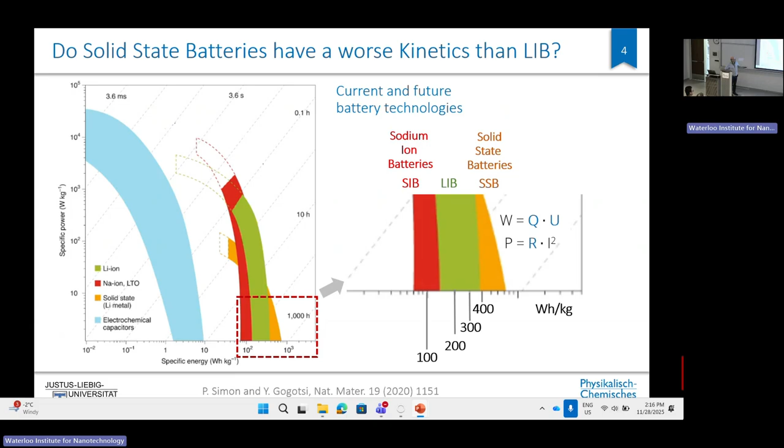So energy is simple, but the kinetics is pretty difficult to estimate. That's why I think kinetics really demands experimental studies. Now, the red and the yellow area, let me briefly explain. From the bottom part, the poor part of this graph, the sodium-ion battery is coming closer. That's for reasons of resources and primarily for techno-economic reasons. The battery world is developing sodium-ion batteries as an alternative at the lower end of the lithium-ion battery. At the upper end, there is the hope that solid-state batteries make it, and we will see why there is hope.

But one point on the kinetics: estimating the thermodynamics, the energy content of a battery, is pretty simple if you know your cell reaction, if you know what is in your cell. But kinetics is difficult because there are different levels of description. You first of all have to understand transport on the molecular materials level. How are lithium and the electrons being transported? Then you make an electrode out of that. These electrodes may lead to curved paths for ions and electrons. You have tortuosity effects. You have pores here. Really a microstructure that complicates the kinetics, the paths of ions and electrons. Then, of course, you bring that into a cell. So describing kinetics is theoretically much more challenging than describing the energy density.

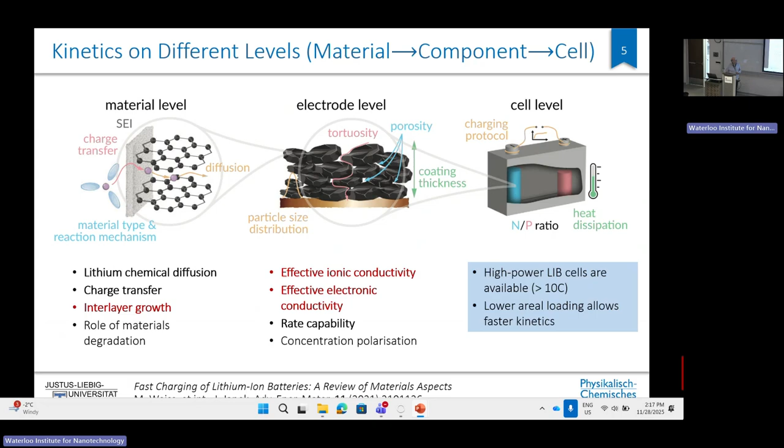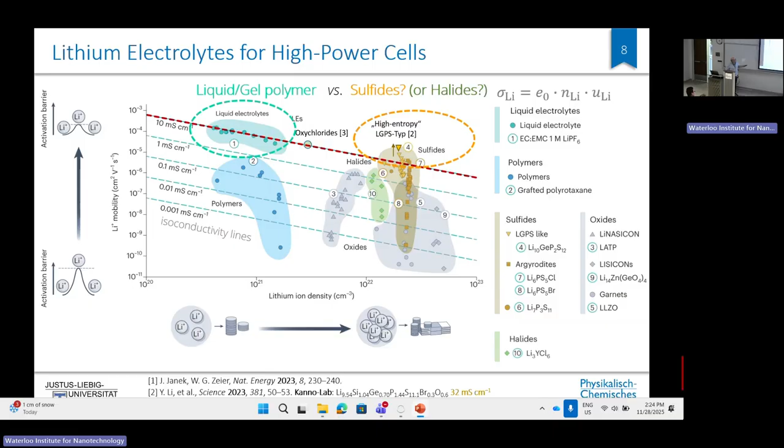Okay, and with that, we can enter into cell concepts, and let's just consider one cell concept, and that is what Samsung advanced a few years ago, which they coined the so-called anode-free cell concept. Now, this is, of course, if you ever had a base course in electrochemistry, quite a bad term. There is no electrochemical cell without an anode. There is always an anode. So what they meant, of course, is reservoir-free. So I prefer reservoir-free cell.

So you just have a current collector. You have your cathode, your positive electrode that contains all the lithium, or sodium in case of sodium systems. And then you have an electrolyte. Either you have a liquid electrolyte or gel polymer, a true polymer electrolyte, or you may go to a true ceramic cell or to hybrid systems where you have a separator that is made of a different electrolyte than the catholyte. And these two cell concepts, I think, are something Linda and I are pursuing and many people in the world are trying to get, because if you don't bring lithium into the cell from the very beginning, of course, you save money.

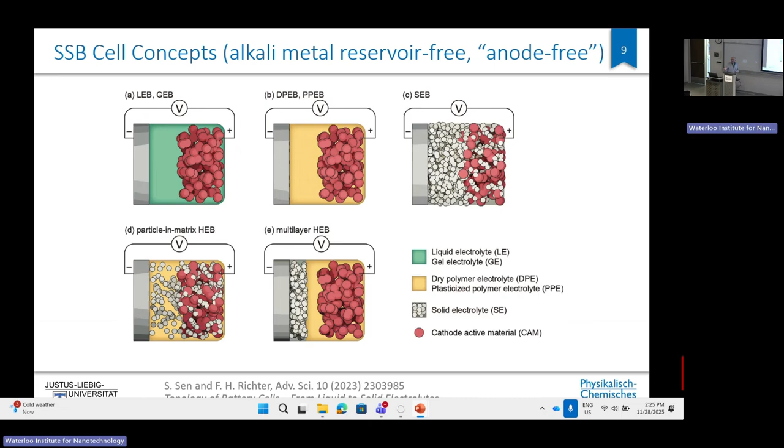It's also easier to process, because processing 10 micron thin or 20 micron thin lithium foils is pretty difficult, in fact, and not cheap. Whether it really works is another question, but I think it's a great idea, of course, to have all the lithium here and in the first charging step, just to place lithium here and to cycle it. Of course, what you need in order to have a good cell is 100% Coulombic efficiency. You should not lose any lithium. And this brings me, of course, to the first point.

This is a bit different cartoon of such a reservoir-free cell. We have a separator electrolyte that should be rather thin, I would say 10 micron. Modern separators in your smartphones are even sometimes thinner than 10 micron. You need a thick cathode, thick because you have to store lots of lithium there. You need a high areal capacity in order to get a high energy density of your cell. And then here the lithium is being cycled.

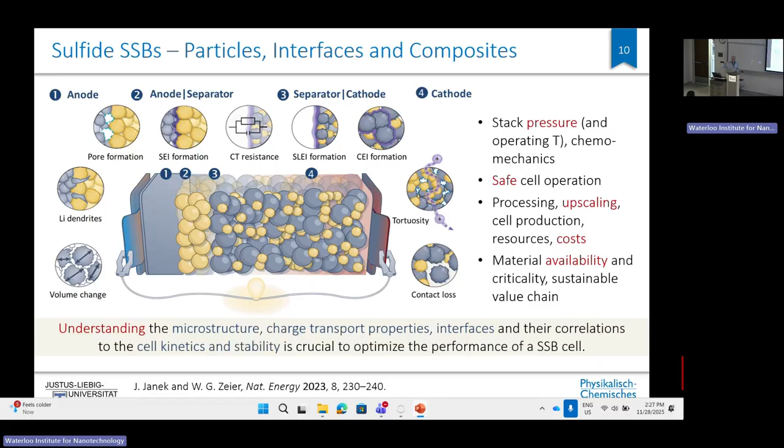And there are quite some issues, all related to the different interfaces in these cells. What my group is doing is trying to understand the microstructure and its correlation with the interfaces to bring down stack pressure. Because if you ever experienced mixing dry peas and beans, you will know there is always empty space in between, and contact may depend, in fact, if the peas and beans are deformable, on pressure. That is a key issue with solid state batteries. So far they mostly operate at relatively high stack pressure, and that has to be reduced. It is one of the major issues.

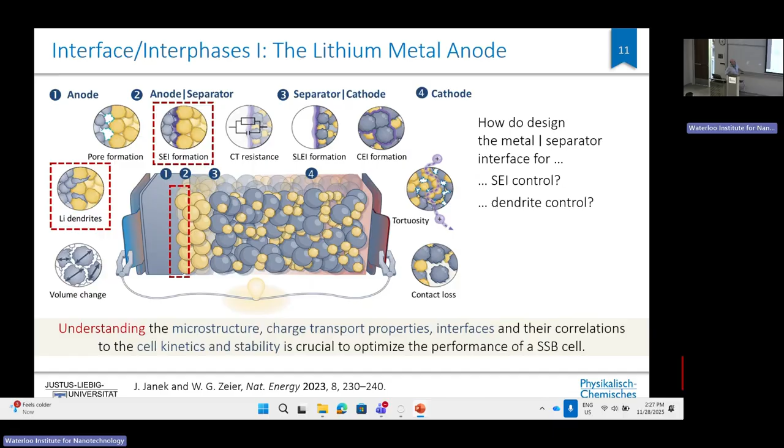Okay, so as I said, let's look first into interfaces. Let's look at the negative electrode interface, and let's believe we can operate with lithium metal, and see whether the electrolytes are stable. This is an important subject that, in fact, in any kind of solid state battery, the same cartoon could in principle be designed for a liquid-based cell. The negative electrode has a very high chemical potential of lithium. If you work with lithium metal, it is the highest chemical potential of lithium you can take, the standard potential of lithium. It's a high chemical potential. So this is chemical potential, not electric potential at the ends of your cell. The electric potential would exactly be the other way around. So there is a negative sign between the chemical potential and the electric potential. So let's think in chemical potential terms.

The anode has a very high chemical potential, and that high chemical potential can reduce your solid electrolyte. If it reduces the solid electrolyte, because the reduction potential of the solid electrolyte is not high enough, then it will decompose, and you will get an SEI. You will get a layer of degraded electrolyte. Now, think in terms of an anode-free or reservoir-free cell. This is, of course, bad.

You deposit your lithium, and it will be consumed by the electrolyte. The question is, to what extent? Is it a minor process? Is it a major process? Because that determines whether you have to add a bit more lithium into your cell, and you have to make it bigger than necessary. And on the cathode side, of course, the same happens.

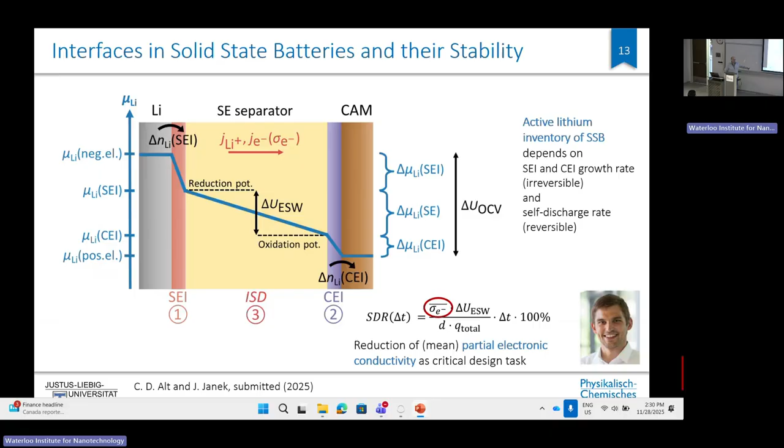For lithium-ion batteries, the self-discharge is very difficult to estimate, because it's due to complex redox shuttles in the liquid electrolyte. Lots of stuff can move between the electrodes across the liquid electrolyte. In a solid-state battery with inorganic solid electrolytes, only electrons can cause an internal short circuit. So the question is, what is the minor electronic conductivity of the solid electrolyte? And that is not well treated and not so well known, I would say. We consider the self-discharge of solid-state batteries may even be an advantage, because if you really bring down the electronic conductivity to very low values, it can be that solid-state batteries hold their charge longer than a typical lithium-ion battery.

Okay, now we wanted to know, in fact, how much lithium is being taken up by solid electrolytes, and Burak, a postdoc in my group, had a very ingenious idea. It's not my idea, so I can say that I found it ingenious. He said, okay, I have a lithium anode here. This is my source of lithium, and here's my current collector, and I play the game of a reservoir-free cell. So I plate lithium here. If my electrolyte is stable, the lithium will stay and stay and stay and will not react away. If my electrolyte reacts, an SEI will form. It will consume the lithium over time until the lithium is gone.

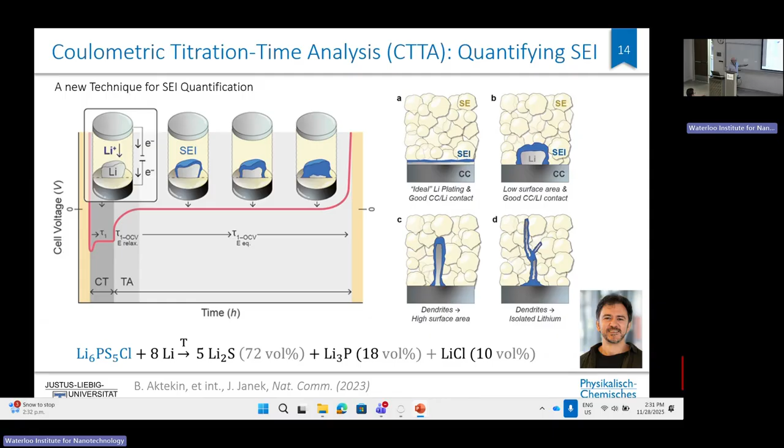So this is cell voltage, this is time. I plate lithium here, then I let it relax, and then I wait. As long as there is lithium here, the cell voltage is 0 volt. If all lithium is consumed and no lithium is here, the voltage will rise quickly. That has reasons, and it will reach a rather high positive value. And you then simply measure the time for the consumption. You make that in several steps. Each step looks the same: nucleation, plating, consumption, and you see that it gets longer and longer and longer.

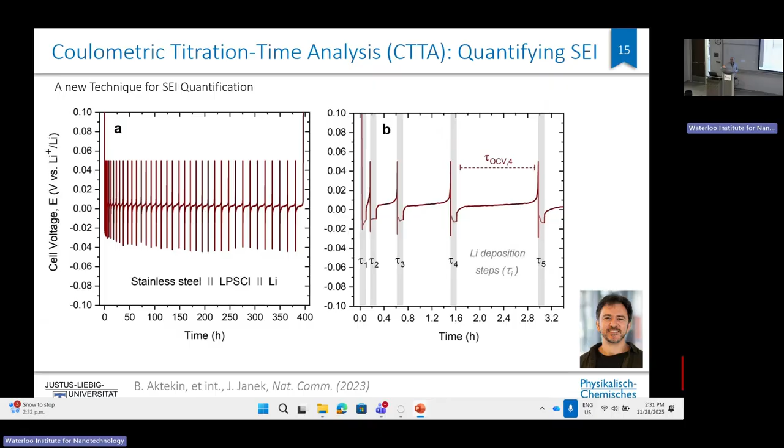What in principle happens is that you form this layer, and the growth takes longer and longer, because it's a diffusion-controlled process. In fact, these curves for charge consumed by the SEI over time show mostly simple parabolic time behavior, as defined by simple diffusion across the SEI. And you see here different solid electrolytes. This is a famous oxide, lithium lanthanum zirconate, and this graph rarely consumes any lithium because it's simply stable. There is lithium germanium thiophosphate. It contains germanium. Germanium is easily reduced by lithium, and it consumes lots of lithium, even within, let's say, 150 hours. The argyrodite, which is a Li6PS5Cl, a sulfide electrolyte,

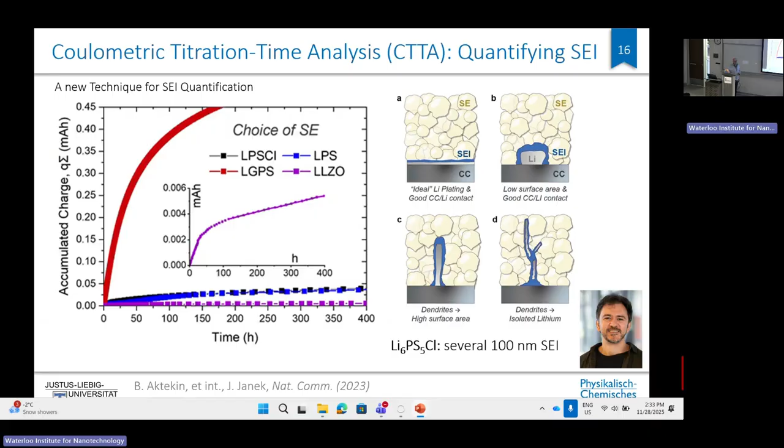Well, it's not so bad. It consumes, let's say, within 400 hours, 25 microamp hours per square centimeter, roughly. That's not so much, but it continues. So this is an issue. There is an SEI forming, and this SEI is still today, I would say, not 100% understood. What I can say is that this can be designed. You can, of course, modify your solid electrolytes such that they form less and more stable SEI, and that's a very important part of the long-term stability of any solid electrolyte with your lithium electrode.

And you see here the effect of temperature. Of course, with increasing temperature, it gets worse. Something that is very important and surprised me is, now we had the garnet oxide as a stable electrolyte. So we used that, but nevertheless, we saw that lithium also disappeared. Where does it go? It goes into the current collector. So the current collectors, the metals, take up lithium.

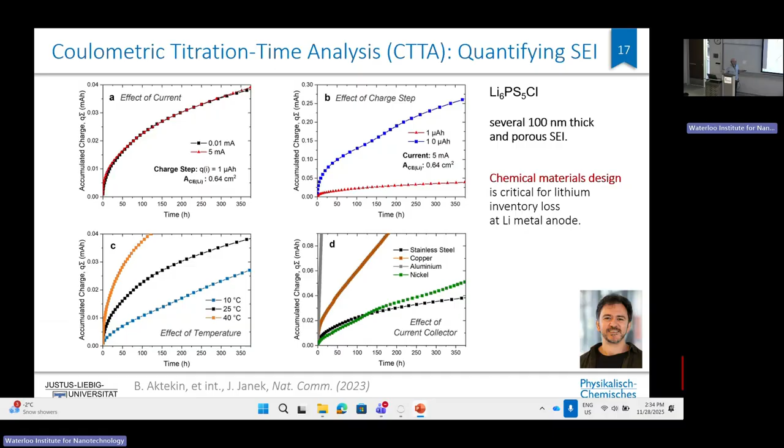And copper, that is considered not to alloy with lithium, takes up quite some lithium. This is not so well known, but it takes up lithium. And meanwhile, I would say we have more studies of that. So copper is really taking up lithium. Of course, aluminum takes up a lot of lithium. In principle, stainless steel and nickel could be better current collectors. But on the other hand, in industry, nobody will quit copper because copper foils are a ready-made mass-marketed metal product. So I think that we rather have to see, is this really an issue or can that be overcome?

Okay, and that brings me to summarize the stability issues. Let's look to the left side. So the oxides, in fact, we found only, I would say, the garnet oxide really is stable. That's why companies worldwide explore this material as a separator material. The problem is to make thin, 10 micron thin, large scale area separators, ceramic separators, cheap and pinhole free over square meters. This is a pretty tough subject. QuantumScape in the US, I think, is trying that since years. And you probably can see the shares of QuantumScape, whether they will be successful or not with that enterprise.

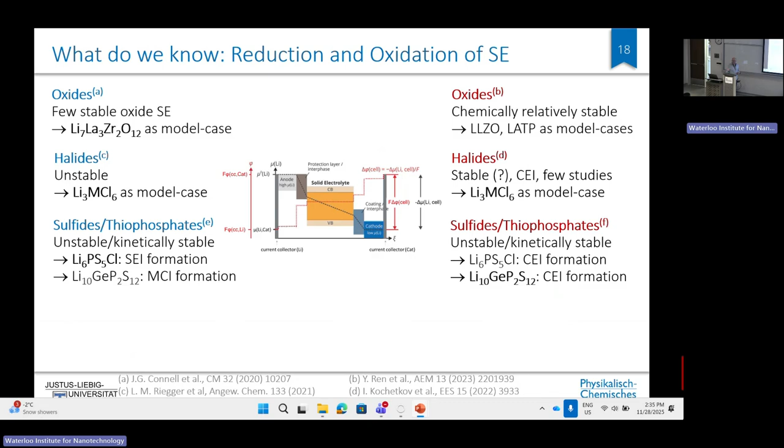The halides or oxyhalides are mostly unstable versus lithium because the metal ions are being reduced. I had a discussion with Linda on that point here, and we probably have to look a bit deeper into some of these materials, but most of these materials are probably not stable at the negative side. The sulfides and thiophosphates are all thermodynamically unstable, but they may form nice, kinetically stable SEIs. Not all, so this is case by case. And polymers, I would say, well, it depends on the polymer, whether they are really stable. If they are stable, then they're probably kinetically stable. They form an SEI, but this is definitely not my piece of cake. They may also have issues with dendrite formation if you go to high rates. Let's exclude polymers here. This is a bit beyond my expertise.

On the cathode side, I will not comment so much on that. The halides may have a major advantage because particularly the chlorides may be stable at the high potentials of the cathode, whereas all the sulfides are not stable because the sulfur is easily being oxidized already at 2.5 volt versus lithium, so they need to be protected. So that means the best electrolytes we have with respect to conductivity are the worst when it comes to stability. And this is, of course, something we have really to take care of. That's why I said design of interfaces. We have to design interfaces such that they survive.

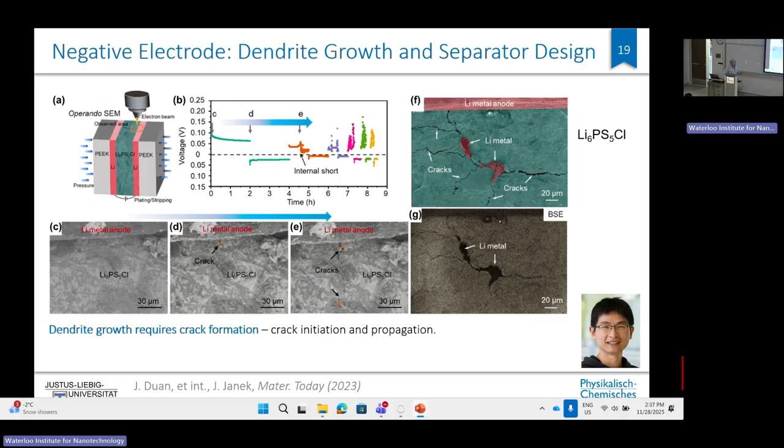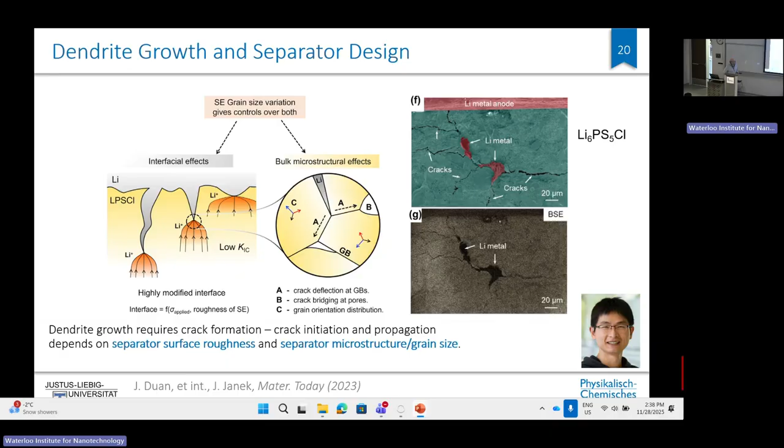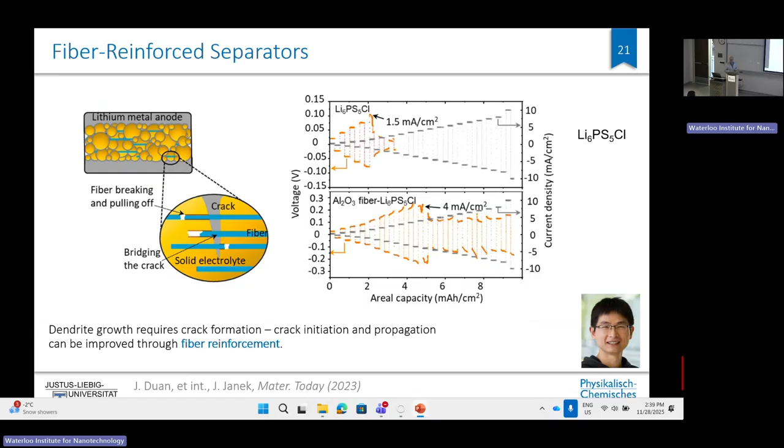And in fact, in these kind of dendrite tests, he could extend the lifetime of the separator to higher critical current densities, because these fibers simply, even if a crack initiated, the crack didn't grow as fast as it would grow in a simple separator. And as I see Mike Pope here, he has just this week had a workshop running on 2D materials. When I put the slides together, I thought maybe 2D materials could be something that help strengthening the separators and improving the chemomechanics of a separator. So that's maybe something worth being discussed.

I need to move on to the cathode side. So let's summarize briefly the anode side. Going for lithium metal, I would say it's by far not solved to have a high rate, stable lithium metal anode. If you see that companies have solved that, okay, let's see the results. Show me real detailed results for current density, stack pressure, and anything. So I think there's still some way to go. And that's why, of course, often the announcements for solid state batteries are shifted and shifted and shifted. They will come, I'm pretty sure, but there are still issues to be overcome. I will be the first to congratulate if that works, but I would say I'm positively critical.

Okay, let's go to the cathode side, where, of course, contact is also quite an issue. These cathode particles and cathode materials breathe as you charge and discharge, and they change volume. The radius isn't changing too much, maybe 100 nanometer or something, but it's enough to open up a crack to the solid electrolyte. And that can so far only be solved by, of course, having strong stack pressure. And often cells are being cycled at 100 megapascal. No way. No car would have enough; you would need quite some steel around your battery to keep 100 megapascal during operation in a car, and that is, of course, compromising the advantages of your cells.

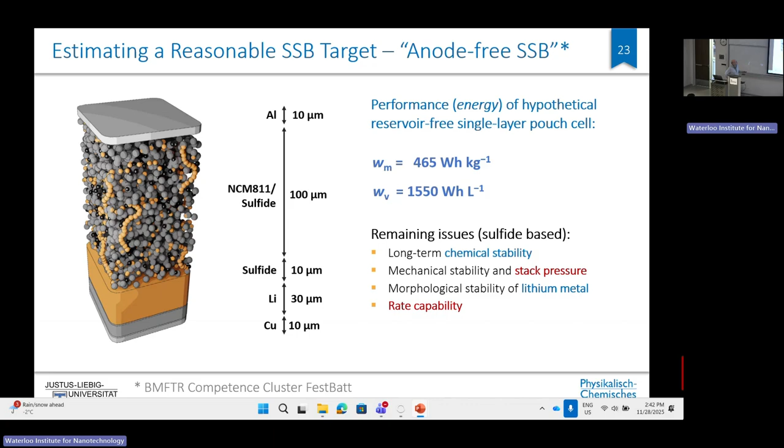There's no housing around that yet. That's not calculated. So with the housing, we may still be a bit below 400 watt hours per kilogram. But you see how difficult it is to really climb up. You have to fight by proper engineering at every corner of your cell to get values that can surpass a lithium-ion battery. Working on solid-state batteries, every day I think, okay, engineers really did so well with liquid-based batteries to achieve the numbers we achieve today. Now, of course, there are still some issues to be solved, particularly rate capability and stack pressure, and stability of this composite over time.

Now, let's think of kinetics. I just learned that for power tools, if you would like to buy a top chainsaw, and I think in Canada there are quite some chainsaws, here in the forests, often they like to see 10C. 10C means that you'd like to charge or discharge your battery in 6 minutes. So 10C means simply that you can charge or discharge your battery 10 times in an hour. So 6 minutes, full charge, full discharge. Of course, OEMs would like to see that also for cars, but it's not yet achieved due to instabilities in cells. But 10C would mean for this cell 65 milliamps per square centimeter current density, which nobody ever really tested. I think for lithium metal, Peter Bruce demonstrated 9 milliamp per square centimeter critical current density without cracking.

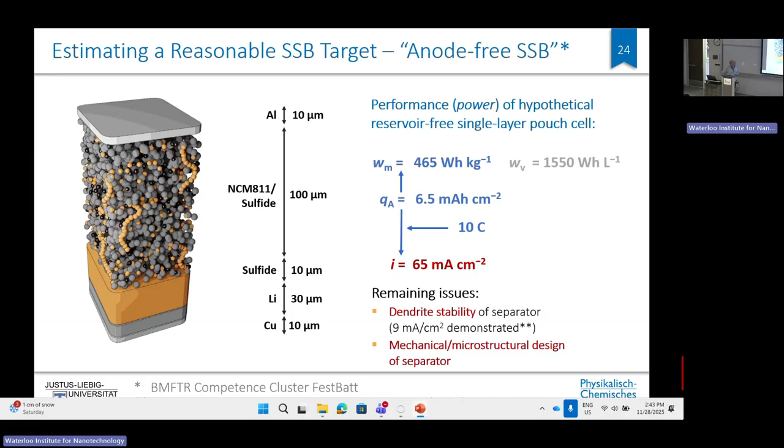So there's still some way to go to achieve that. But we already enter, I would say, when Peter Bruce went beyond 1C, which is already quite some success. So one issue then with the cathode, first of all, let's now slowly come to the cathode side, is

I assume that a typical solid-state battery later may be a bilayer cell, where we have to use one electrolyte that cooperates well with the anode, and one that is optimized for the cathode. That's a major advantage for solid-state batteries. In a liquid cell, you can't use two electrolytes. It's a liquid. It will mix. So the inherent advantage of a solid-state concept is that you can use two different electrolytes.

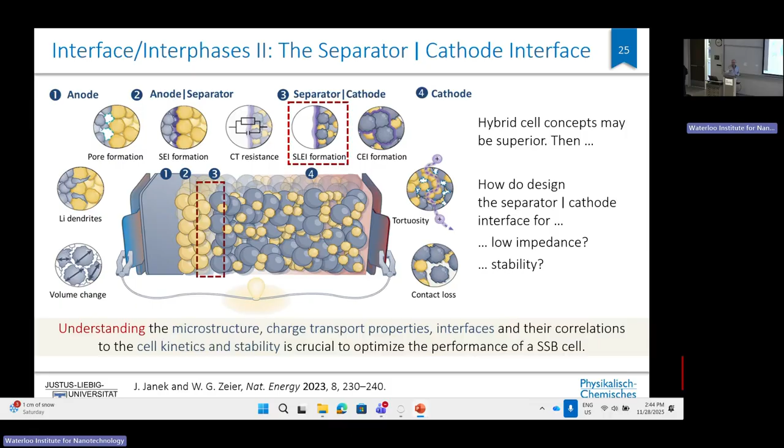But that brings up one new interface. We call it heteroelectrolyte interface, an interface between two different solid electrolytes. And the question is, is that good or bad? How much energy do I need to transfer an ion from one solid electrolyte to another electrolyte? There's not so much data about that. Meanwhile, there is more data, particularly again from the cooperation between Linda, Jeff, and me. And this is a very nice cooperation between Wipin and Leo in my lab. So Wipin here in Linda's group and Leo in my group.

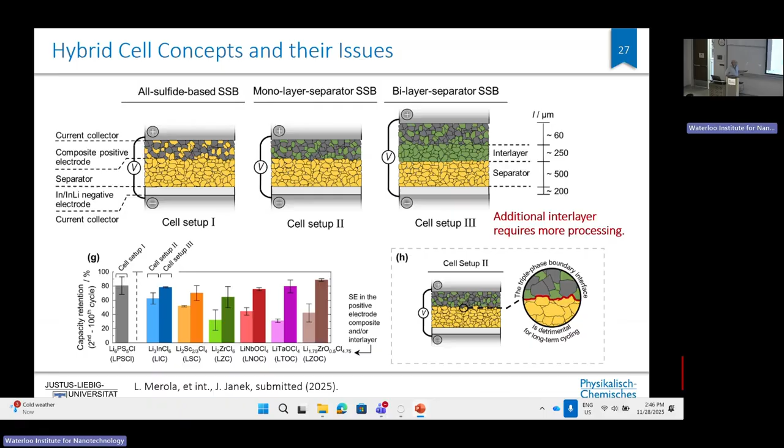And going deeper into that, which I will not do, there is lots of chemistry going on at these triple phase boundaries. So the two electrolytes react via the cathode material, and that is the reason why this simple cell concept, which looks so nice, does in this case not operate so well, and we always need some more interlayer, and then in principle you can achieve a higher stability.

And then let's look really into the cathode, and I look a bit to the time. I think we started a bit late.

Yeah, okay. So let's look now to the cathode side. So the first interface was the anode side. The second interface was this heteroelectrolyte interface, where the story, I think, is still not over, because the problem is, again, if you take two pieces of, let's say, paper on the micro scale, you will not have full contact. And contacting two inorganic solids creates a lot of pores at the interface that causes constriction, only few contact paths, and the resistance always still is too high. And these interfaces also have to be designed, which I think is not yet done.

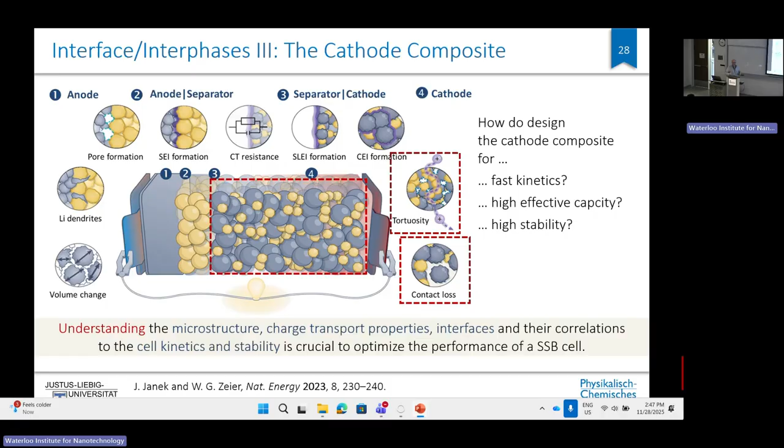Okay, let's, however, look to maybe the other most important part of the battery, and that is, of course, the positive electrode. It contains in the reservoir-free cell all the lithium. So that's, of course, why it's so important to understand that better.

Now, quite some time ago, Anja Bielefeld in my group, who meanwhile has her own group in Giessen, studied what we have to do to get a good cathode composite. And if I speak of composite, I mean the cathode material that stores the lithium and the electrolyte. Two different powders we have to mix. Think of two powders with particle size distribution that we have to mix. And I will show on one of the next slides that one of the best things we did was starting a cooperation with particle engineers. They know exactly how to mix properly.

And as a chemist, I only learned how to mix liquids, but not how to mix solids properly. That's much more difficult, in fact. So what Philip did, he determined what is really the ionic conductivity and the electronic conductivity. Both are needed in a composite because the electrons from the electrode and the ions from the electrolyte have to come together to store lithium or to get lithium out. So you need two, let's say, good interconnected paths, ionic and electronic, to get a good electrode.

Well, like in your lung, where you have, of course, highly tortuous ways for air and for blood in order to have an effective breathing process. So this is the same with ions and electrons in the cell. And here, as a fraction of cathode material, Philip measured the electronic conductivity and the ionic conductivity. And of course, quite trivial: if you have pure electrolyte, the ionic conductivity is high; pure cathode material, the electronic conductivity is high, because these electrode materials are primarily electronically conducting. Ionic transport is there, but it's not so fast. That's why, of course, cathode particles are small, in order to have short diffusion lengths for the incorporation and excorporation of the lithium. There's a sweet spot somewhere in the middle.

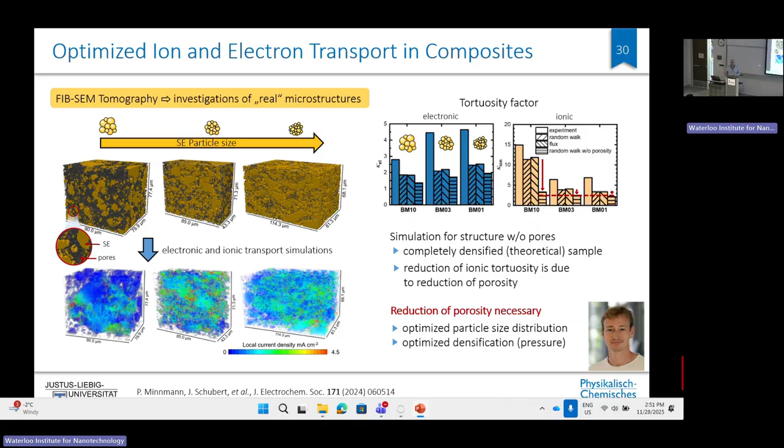Okay, and that's showing how important pressure is. And not only how important pressure is, but how depressing it is in a sense, because still today, you need quite some pressure to get good charge out and into your cell. So with increasing or decreasing pressure, the charge you can get out of an electrode changes quite a bit. There is already quite some success with less pressure sensitivity of your electrode, but I think this is still a key issue. And if you ask, for example, EV producers that are honest, they would say, of course, a solid state battery should have the same stack pressure as a liquid-based battery. And that is virtually atmospheric pressure, maybe just 1 bar, 0.1 megapascal, but not 100.

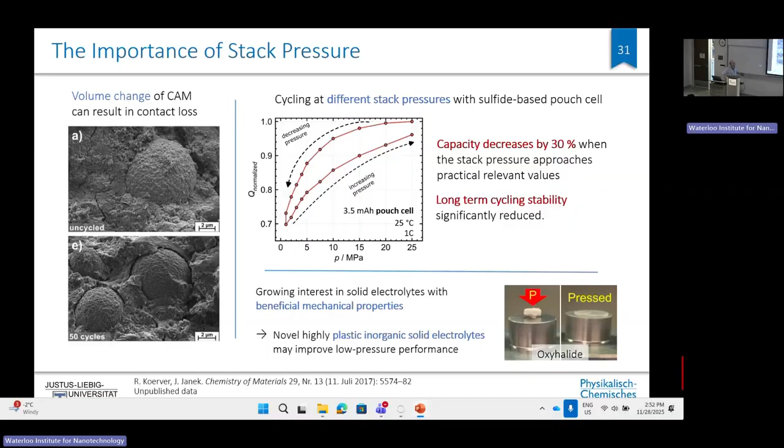I made a comment here. I think what is really interesting, and Linda is at the front end of that research, is that there are materials meanwhile, particularly oxyhalides, that are really viscoplastic. They can easily deform, and again, for the interface design in cathodes, clever materials design is also needed. Polymers may enter into that, but polymers have their disadvantages. At these high potentials of cathodes, they are often easily oxidized and not so stable. So that's why an inorganic solution might, again, be better at this point. There also, Linda really looks into that in depth.

Finally, when it comes to the cathodes, part of our work is to develop methods and to quantify things. And one interesting aspect we found out by cooperating with a particle engineer. Finn is a particle engineer, and Max is a material scientist in my group, and they cooperated on trying to better understand the constraints of these composites. And there's a simple thing that is, I would say, trivial at the end, and that is what you typically do.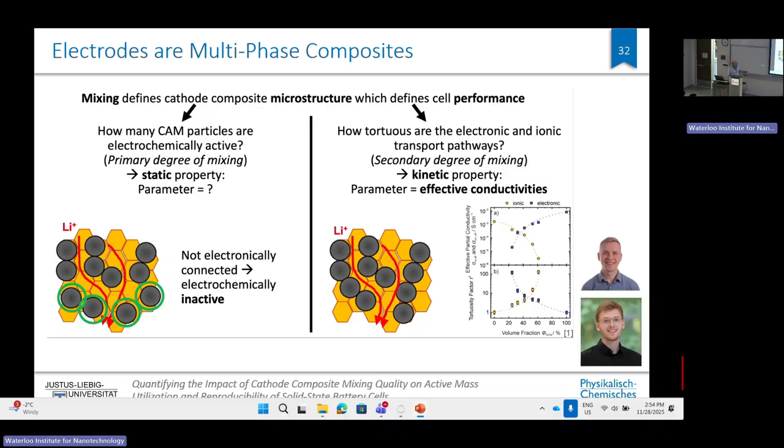So that means they cannot be charged. You need to contact them fully, ionic and electronic. And this has to be determined. This determines, so to say, I would say, static connectivity. And then if all are connected, then of course you can judge properly the kinetic effect, and that has to be separated. And this is one of the, I think, nice things.

There was a study last year where 20 labs contributed, and this kind of benchmarking test showed that the 20 labs got all the same materials, had to construct the same cells, and there was a wide variation of results. And one of the major factors for that was that every lab, the students in every lab, mostly made their mixtures and cathodes mechanically with a mortar and pestle, and they mixed it a bit somehow, and then you have a human factor in that. And if you change that and go to a more, I would say, professional machine-made composite, immediately things get better.

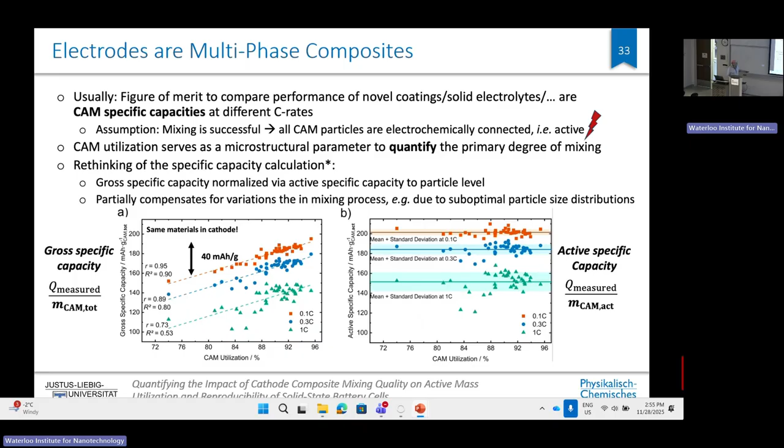And then the data for the different, let's say, cathodes, each dot here is one cell, essentially, at different C rates. So this is 1C, 0.3C, 0.1C. You see these data really scatter quite a bit, but when you order them with respect to the utilization, really, the fraction of cathode particles being connected, and normalize it to that, then all these data nicely, I would say, fall onto one line, onto one capacity value, and that is then, I would say, correct. Then you can really judge, okay, my cathode material has this capacity at a given rate, and you do not include into your judgment of the kinetics of your cell those particles that are not being connected. So that's a very important step.

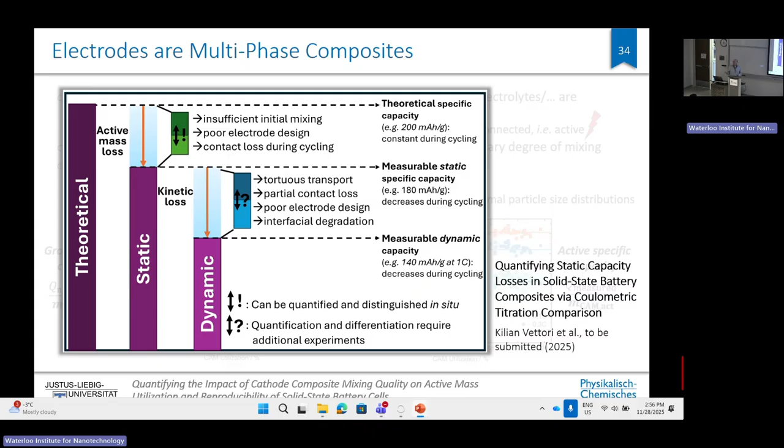And this is in this graph here. So there's a theoretical active mass of your cathode material. And there is always some loss of material due to the fact that not everything is properly connected. Let's call that static loss of capacity. If you account for that, then there is a remaining loss, and that's the kinetic loss. Only that is the kinetic loss. If you don't account for that, you will think you have a much bigger kinetic loss in your system, because you would then simply add both together, but you have to separate these, and then you have a much better, I would say, judgment of the quality and mixing of your cathode.

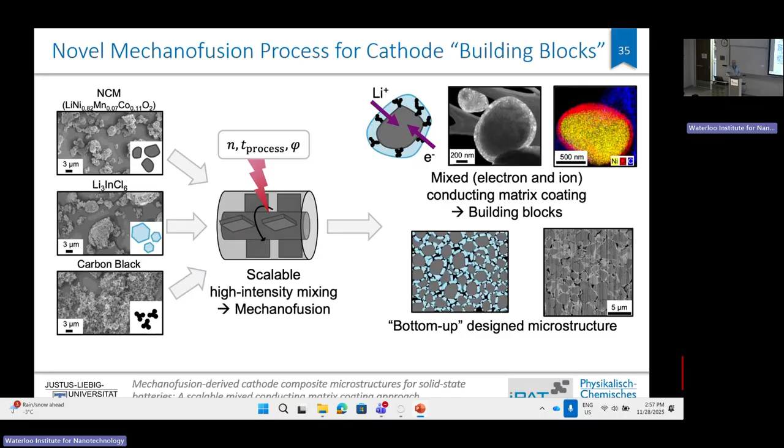Yeah, and two examples for the performance of solid-state batteries, just so that you see a bit of performance. So this is from a recent paper from the Bella Lab in Karlsruhe, which I'm directing. You see, this is a cell with a nickel cobalt manganese cathode material, a classical sulfide-type cell with an LTO anode, which is a lithium titanate, which is, I think, not leading to high energy density, but leads to relatively stable data. But you see, after 300 cycles, there's still a loss, with around 80% capacity retention, which still is not good enough. With halides, that is data from Linda's lab here, where we contribute with some analytical data. You see also here 700 cycles for a halide, which is a lithium indium scandium chloride.

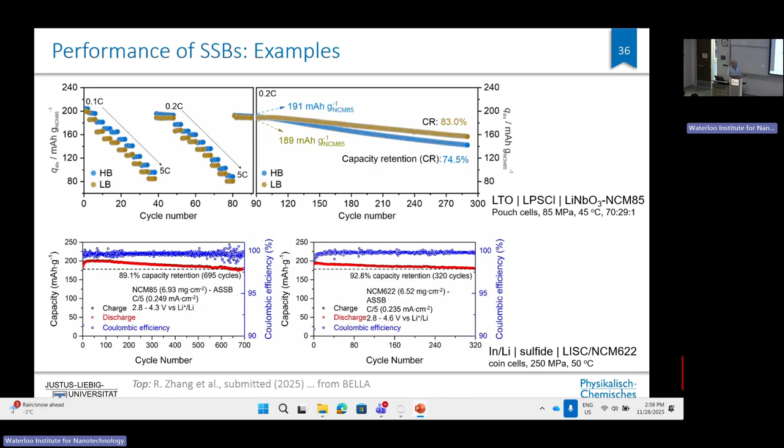Quite impressive data for cycling. So these halides are, I would say, quite promising, and that's why Linda, of course, is pursuing the research into these halides. They may show more stability and maybe even more favorable mechanical properties.

Okay, if you allow me 5 more minutes, I will end up with some work which excites me most, and that is, again, going back to the beginning, the lithium metal electrode. The point is that lithium metal is so important because only with lithium metal can we really climb up to ultimate specific energies.

But not so much is known about the lithium metal electrode, and particularly about the inner structure of lithium metal. You can imagine why. It's so reactive, it always has a passivation layer. So we wanted to understand more what is the microstructure of lithium metal.

That goes back in principle to theoretical predictions by Don Siegel from Austin in Texas, who predicted that if you have small-grained lithium, let's even assume nanocrystal lithium, diffusion in the grain boundaries is much faster. And so the idea was that this nanocrystalline lithium may have much better kinetic properties than large-grained lithium.

We looked into that, and Dheeraj made some coarse-grained lithium and fine-grained lithium, where still the fine-grained lithium, you see, has quite big grains with 20 micron diameter. He was never able to make smaller-grained lithium because lithium is really growing fast. Its grain growth is extremely fast.

But nevertheless, these white lines we thought may be grain boundaries, but the lithium has a passivation layer. It could also have been cracks in the passivation layer. So we were not sure whether we see really the microstructure. So that's an important point. Nevertheless, the small-grained lithium in stripping delivered more charge than the large-grained lithium. So in principle, the assumption that small-grained lithium is better was okay.

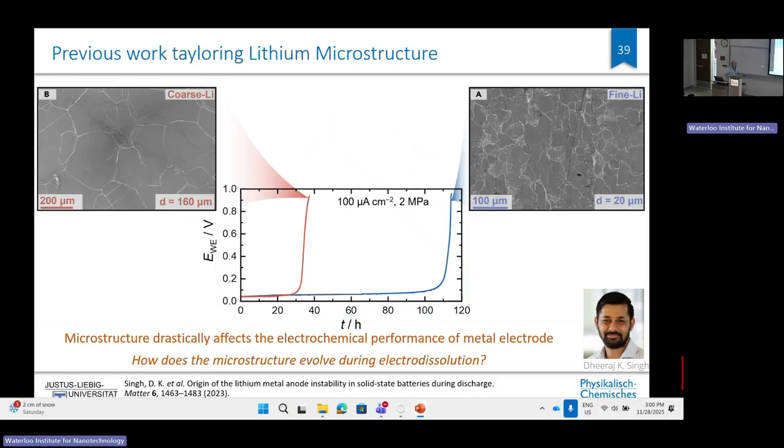So the question is then, what is the microstructure of lithium in a reservoir-free cell? We don't use a foil, where the lithium is being plated. What is the microstructure of that? Nobody knew that. And this is work that two Tills in my group, Till Fuchs and Till Ortmann, did, the Tillies, essentially. And this is also a nice result of a cooperation. So this is a joint paper with Linda and Jeff Sakamoto.

And what you see here is already, I think, a major result. So what they did, they created a cryo workflow, FIB cutting, and then ion polishing, and transfer everything under inert gas and cryo conditions. And what they then got is cross-sections of these electroplated metals: in this case, sodium on NASICON, lithium on garnet, and lithium on an argyrodite electrolyte. And the color is simply indicating the orientation of a grain.

So this is really electron backscatter diffraction, essentially electron crystallography, that only works if you have very clean, undamaged surfaces. Then you get the electron pattern, the Kikuchi pattern, in principle. And the shocking result was that these grains are really huge. You see here, 100 micron, they grew in some cases almost up to 100 micron grain size. So the idea to create small-grained lithium didn't work.

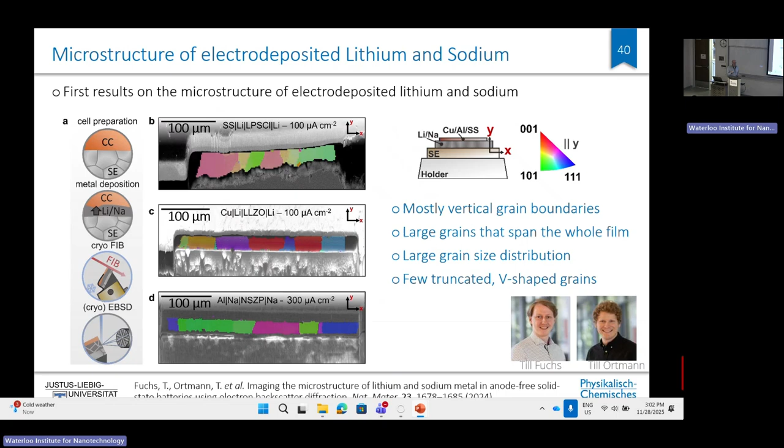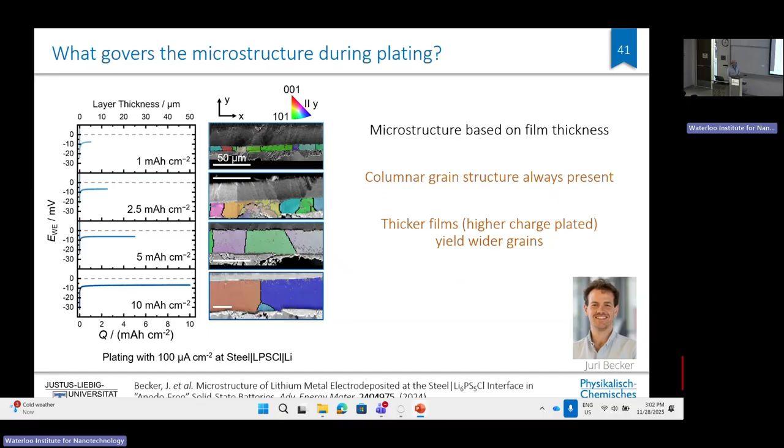And in fact, we never got small-grained lithium. This lithium that is being electroplated is so pure that nothing stops lithium from growing and growing to large grains. So you see, with making it thicker and thicker, the grains grow and grow. So we are still on the way to better understand what is going on, together with colleagues in metallurgy. But meanwhile, we know that it seems to be even reversible. So grains grow with thickness, and if you then strip, the grains shrink again. It's really interesting from a crystallographic and metallurgical point of view.

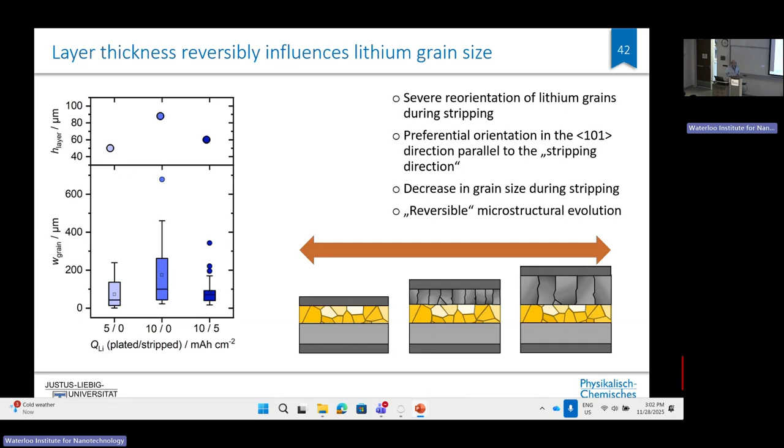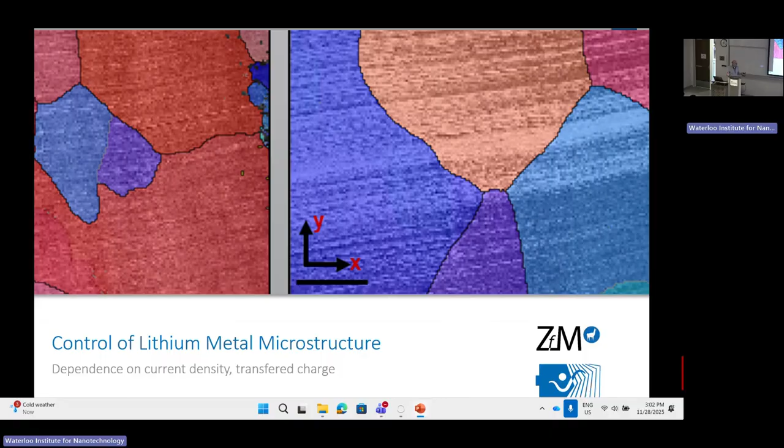But then the question is, okay, is there any way to control the microstructure of lithium? The point is, pure lithium, I think you cannot control it. It will always grow due to Ostwald ripening in principle, because the lithium is so fast. So we need to modify that.

And this is what, in principle, Samsung already did in their paper on reservoir-free cells, because they used a silver carbon interlayer. I would call that electrometallurgy. So they put a dopant, in principle, at the interface, and if you then plate lithium, or do that with sodium, you can do the same. What you do then, with a dopant in this interlayer, is go into a binary phase diagram and create an alloy. And alloys typically have much less mobility for their constituents.

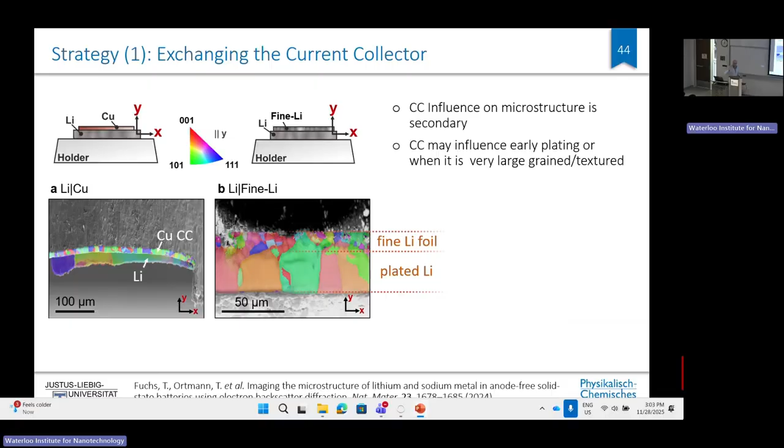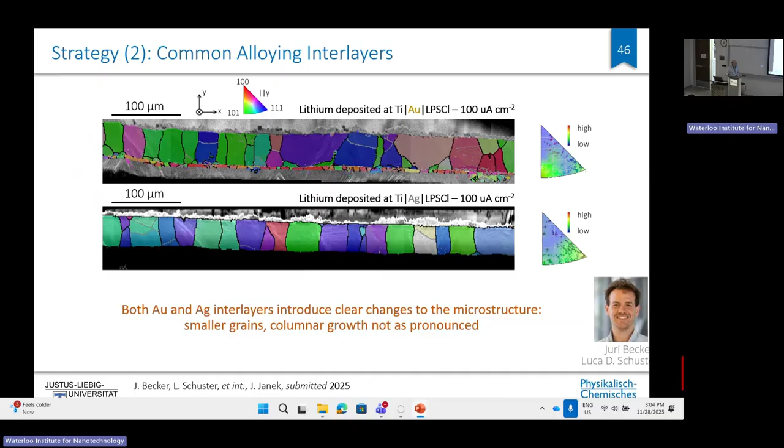And so what you see is the copper current collector is, of course, quite small grain, and the grains grew much, much bigger. So first of all, the current collector we found has no influence on the grain size. So the idea to use a current collector that is somehow defining grain size of the lithium, that doesn't work. But if you then take, for example, gold as an interlayer, or silver as an interlayer, this is on titanium current collector, then in principle we see there is an effect. Grains remain smaller. I would say it's not super impressive, but you can somehow control the grain size already. So I would say this is a good starting point.

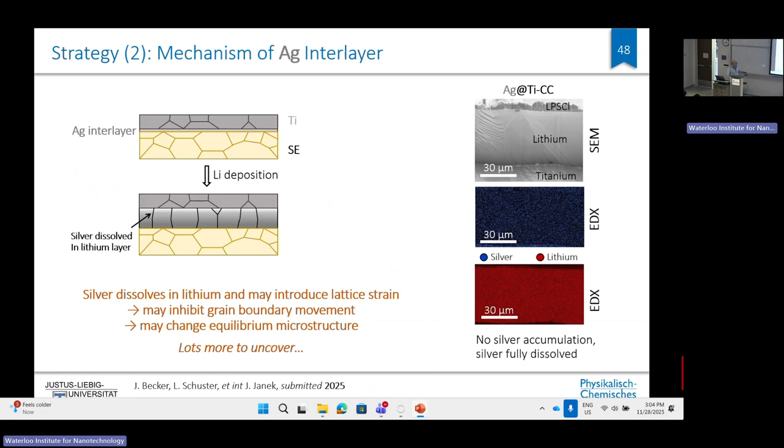Interlayers can control microstructure. In the case of gold, we even have, I would say, a hypothesis, because what we saw is out from the gold interlayer, little lithium-15 gold-4 intermetallic phases, little particles grow, and we think that they really pin the grain boundaries and they can't move anymore. So there is, again, I would say this is electrometallurgy. You dope during plating and you get the dopant back if you strip the lithium, which is, I think, quite nice. The case of silver, it's completely dissolving in the lithium. There must be another effect which we don't yet understand.

Okay, with that, let me come to the end. I think solid-state batteries really require both chemical and advanced mechanical microstructural design. There is room for design, and there is need for this design before they, I think, really operate properly. They will come. Don't ask me when. I'm not a prophet, but I think to get it as a mass marketed product will take some time. And at the end, there are two advantages, maybe not those advantages that were expected at the beginning.

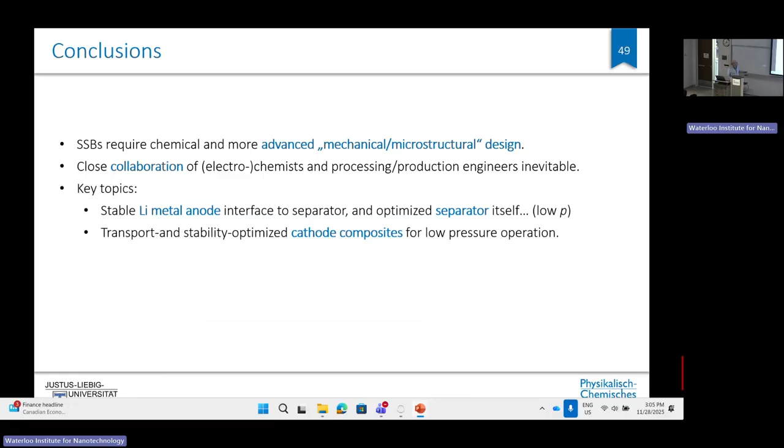I think it really needs a strong collaboration between electrochemists and engineers. Inevitably, I realized that myself. The lithium metal electrode really has further to be improved, particularly the separator concept. I think at the end, a 10 micron thin separator has to operate stable against dendrite growth. And that's something that still has to be improved. And of course, cathode composites also need to be better designed to have stable, high-rate operation.